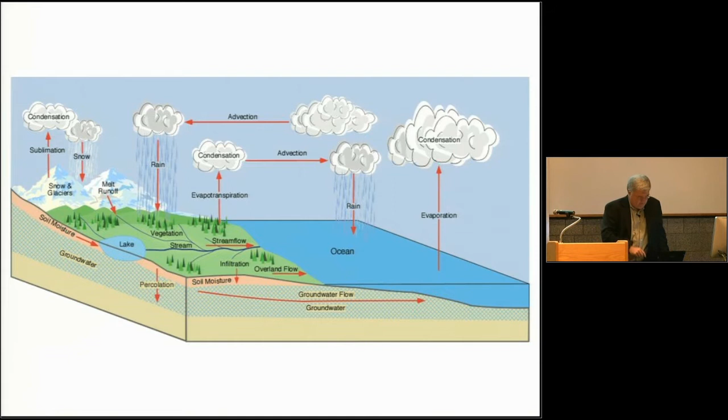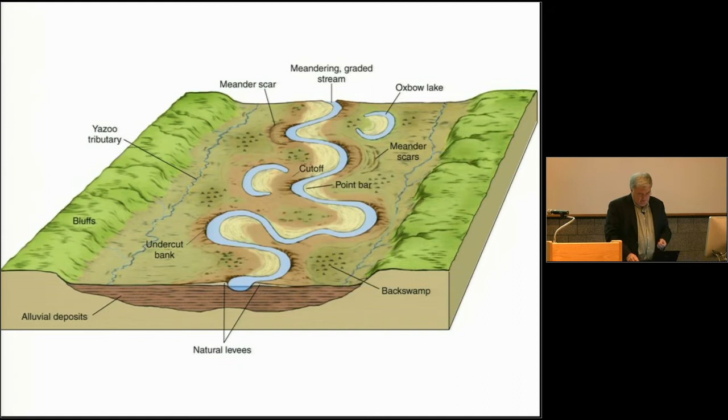Then when the water falls on the site, it moves into the subsoil. You have the interrelationship of the water at the surface and then the groundwater. And in between those two, there's that zone of capillary water that's available to plant growth.

Because we're landscape architects dealing with soil as a medium for growth and also as a medium for constructing hardscape, we need to be concerned with the groundwater and that area above it that has capillary water available to plants.

If that groundwater is too high, your plants die because they drown. If it's too low, they die from the other extreme. Being aware of that groundwater and how it interfaces with your plants through capillary action, where the groundwater is pulled up and made available to your plants, is important both at the macro scale and also at the micro scale.

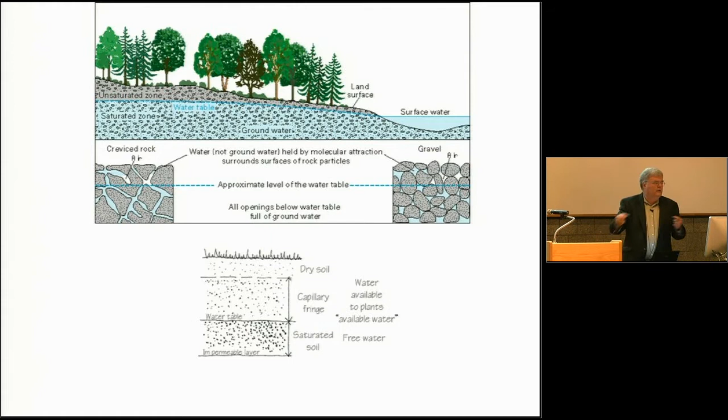Think about a beach by the ocean or a big lake with some wave action. There's a sweet spot where the sand is wet but not too wet and underwater, and not too dry, and that's where you can run. That zone is where the optimum strength-moisture ratio is for that particular sand. On one side it's too wet and too soft; on the other it's too dry and too soft. Understanding that relationship between moisture and soil is important both in plant growth and in structural stability.

When you're dealing around water, the problem generally isn't not enough moisture, it's generally too much. How you can deal with that is sometimes with under-drainage. Farmers have used under-drainage, drain tile, particularly in this part of the world, forever. It was once done with clay tiles; now it's generally done with plastic. It can also be done with swales to lower groundwater.

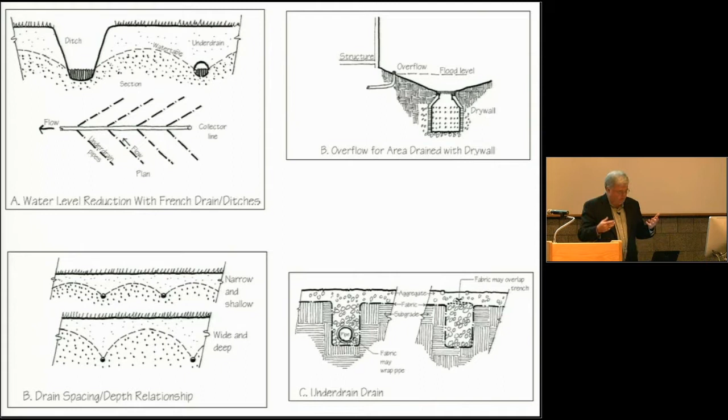Sometimes you want to deal with infiltration and filtration of fines at the top, keeping them out of lower, more well-draining soils below. You can do that with differentiation, having a very coarse gravel and going to finer and finer gravels as you move up. What happens microscopically at the top is that the finer soils form little bridges over the larger soils, and that's how old French drains used to work. They're actually still used today a lot. Contractors will often take shortcuts with fabrics, but that's actually trickier and less sustainable because fabrics can clog, whereas these drains tend not to.

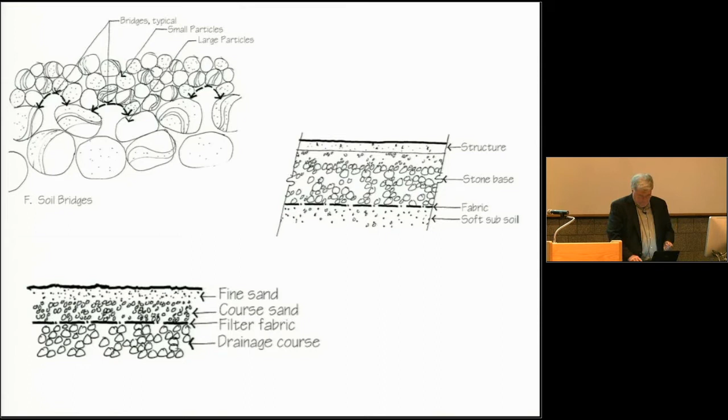That works great for buildings, it was developed for buildings. It allows moisture separation between inside and outside, and it allows for air movement. But if that detail floods, you could have serious problems with failure. In a landscape situation, that's not necessary, you can build solid on the outside. That air gap needed for a building to make habitable space isn't really needed for retaining walls and the like. So to pick the right detail for a condition, like flooding or a stream bed, you need to design something durable and strong enough.

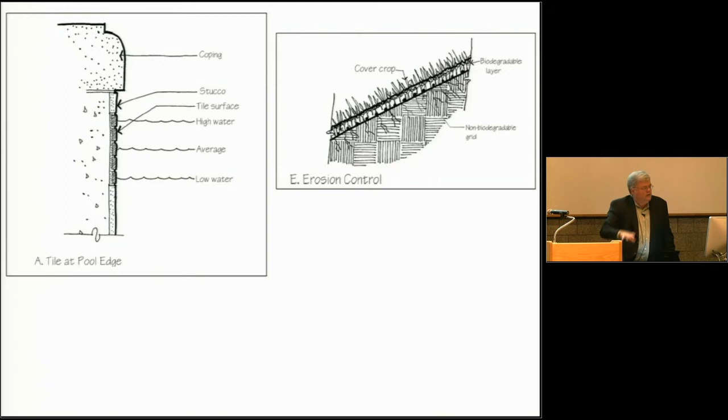On the right is a reinforced vegetated slope that can stand up to periodic inundation and flooding, where plants hold the soil for the most part, but there's an integrated plastic mesh of some sort that prevents blowouts and makes that edge sustainable.

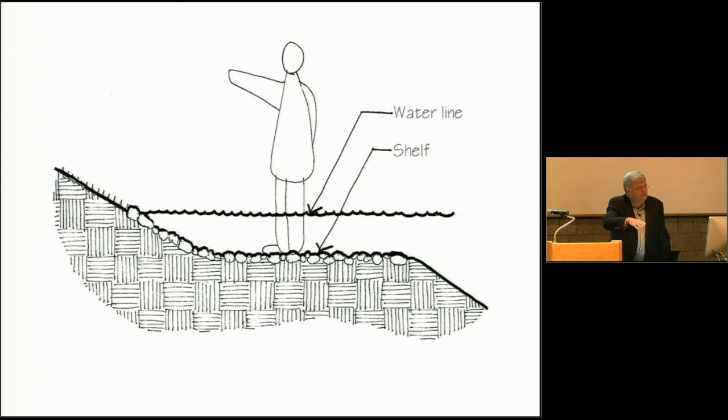There's a flip side to this. By creating a shallow shelf here, you have a lower, more shallow water area that plants can infiltrate into. So there's a trade-off between how that edge works, how vertical it is, how safe it's going to be, versus having deep enough water to keep out emergent aquatics.

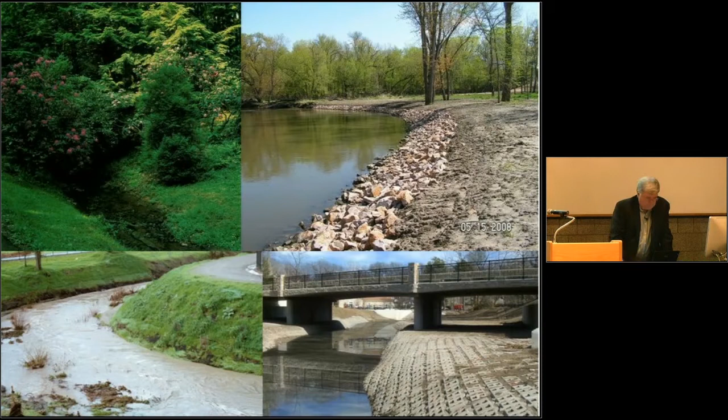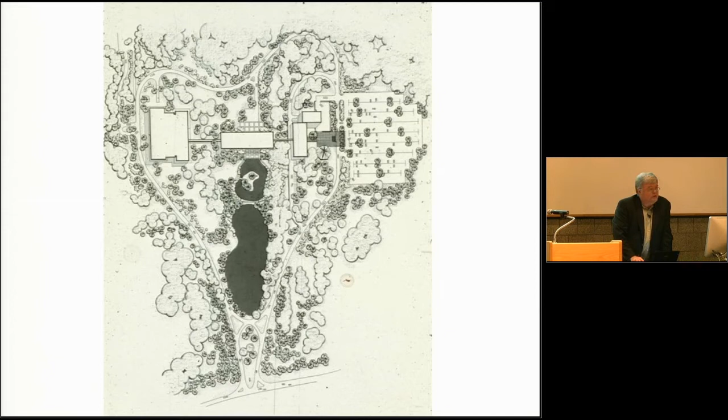This is a project in Moline, Illinois. It's an old Sasaki project from the 1960s, the John Deere headquarters, and it's a very manicured landscape. Didn't start out that way, but John Deere sells lawnmowers. And what started out as kind of a natural landscape, gosh, they turned into turf. And it's turf down to a pond level, with all this mowed turf.

Well, it's kind of unsightly to have that just kind of ragged at the edge. So this started out as very natural, and if you go back to the plan, it's a very naturalistic looking plan. But over time, the maintenance here turned it into something quite different. So this edge of stone was installed. There's an island with sculpture on it. But what started out as a very natural thing through owner's intervention turned into something very, very man-made in section that doesn't match the plan at all. Still pretty.

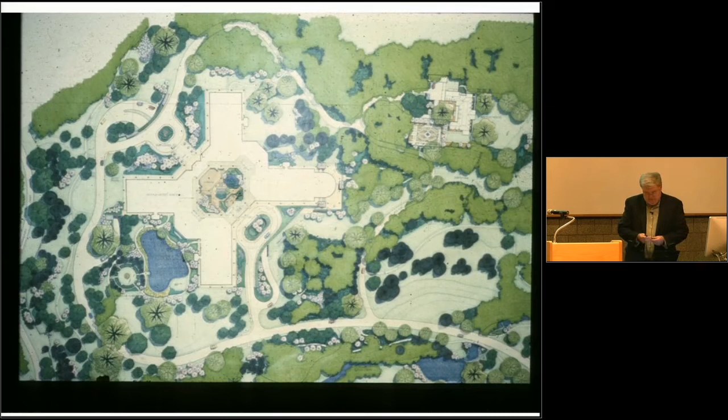This lousy picture is a corporate headquarters outside Cleveland. It was built for TRW. It's now the Cleveland Clinic. And this one has two interfaces with water. There's one here, which is a static pond, and one over here where a stream comes through and is impounded. And then there's a weir and a second weir over here to maintain water underneath a bridge.

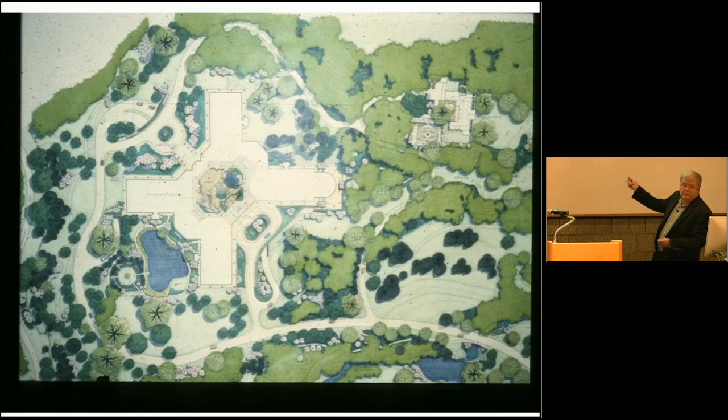So looking at this is the static pond by the building, which has a combination of soft edges and hard edges and deep water and shallow water to accommodate aquatics, and then the interface of land to water as more of a clean edge.

But this is the bridge, and in the foreground you'll see the weir that backs up and creates the larger kind of kidney-shaped pond, and then there's another weir beyond the bridge which maintains a constant water level under the bridge. This was an intermittent stream that came and went, and the architect that was heavily involved in the bridge said, well, we got to have water under the bridge all the time. Okay, how do we do that? Well, we put in a couple of weirs and we'll dam it up. We'll leave it there. Even if it's not flowing, it'll have water over your bridge, will make sense even in August.

So there was this kind of curvy design that was put in, and weirs that were supposed to look like they'd always been there. But it was done more by how it would look in plan and how it would look relative to the existing vegetation. It swooped in and out and around some existing trees. And over the long term, it didn't really work very well, because the stream ran fast in the spring and then slowed way down, so you got a stream channel that was basically the old stream channel that was free flowing, and then you got deposition.

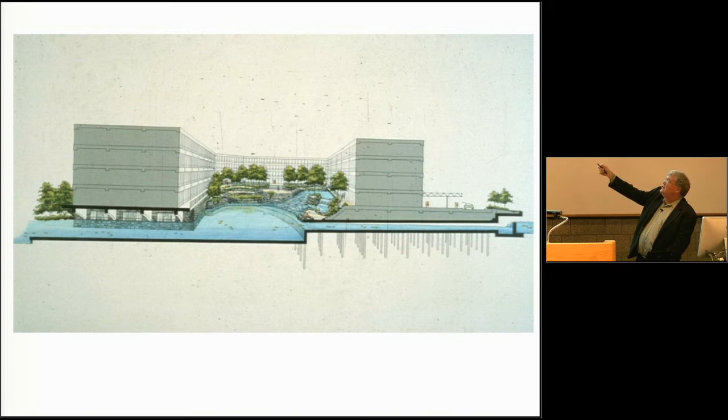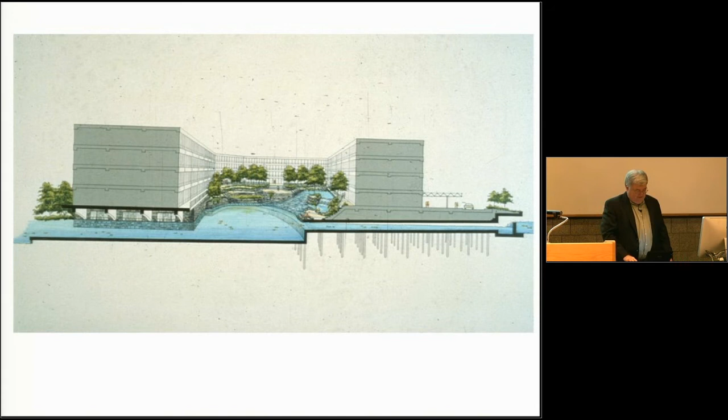So, working with the engineers, they developed a massive flood conduit that goes right underneath the main lobby of the building and spills out underwater. The right-hand side is a bridge. Aesthetically, you have the water circulating in ponds upstream, and it disappears. You have a drop-off in the main lobby, and hanging gardens and things that work down. You have your communal space, your cafeteria out in this bridge space that looks out to the lake. But in order to get there, you had to create a huge infrastructure under the building to make this work.

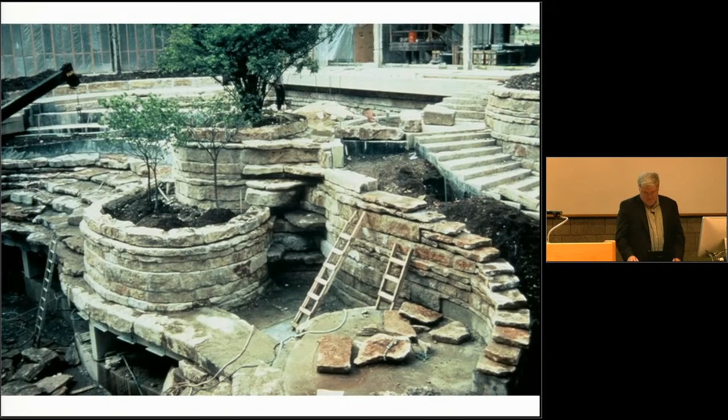That big open area is the flood conduit that allows water to pass through unobstructed. This is the construction of those gardens that are the center of the atrium of the building, built on the structure of the conduit. You can see the structure below here, where the water comes out in 4 barrels, and 2 are redundant, so if one gets clogged up, the other 2 still work. So it's engineered and counter-engineered, and that's what it looks like when it was planted.

So it's kind of the basis for this garden. It's a hot climate, so you have all that water evaporating here and pulling the cool air up through the middle. So from that standpoint, it works, but they went to a tremendous expense to make it happen.

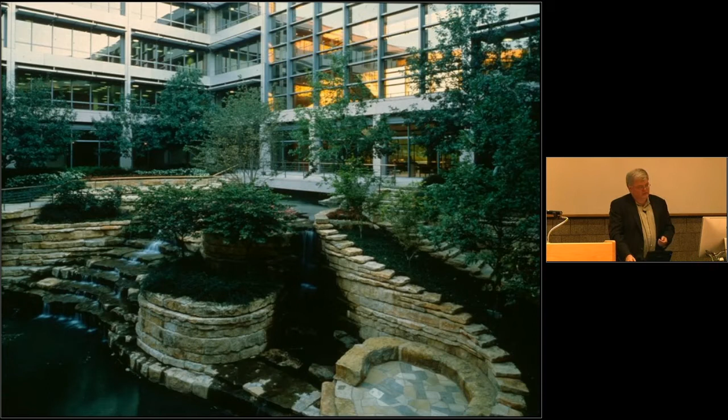Another picture, this is a picture of the cafeteria cross that's on the bridge that spans over. Another picture of that. This is the edges of what happened to the edges along the lake. And that's the spillway at the other end, which shows the capacity of the water that comes through here when you have the flash floods.

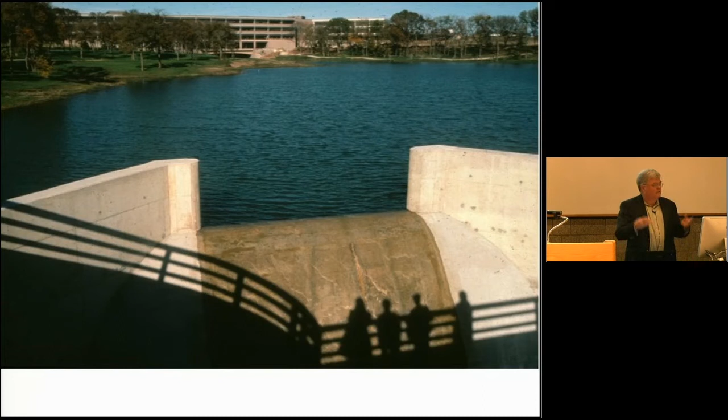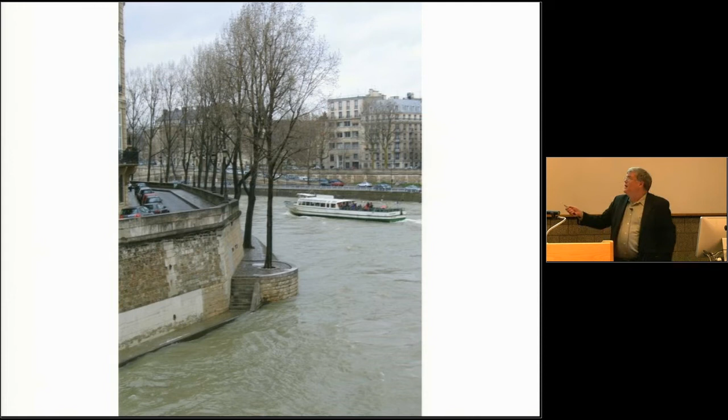There's an access down here, a stairway up, another level here, and high water is up here somewhere. So at any point in the water, you can get down, or get down to a portion near the water, and engage the water as a pedestrian.

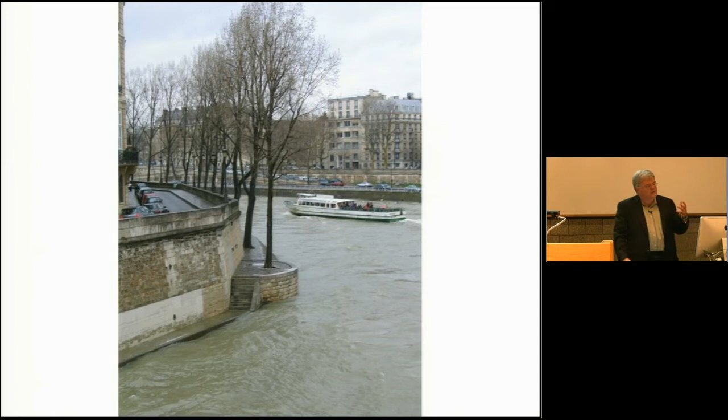Here they have boat traffic on the Seine. This is fairly high water, and they have a series of ramps and stairs and another level up, all engaging the river at different flood levels to allow people access.

One thing you notice is that when rivers flood, you get a lot of junk, and when it goes down, that junk deposits. This is fairly clean compared to other rivers—depending on whether there was more of an agricultural watershed, this would be full of silt as well. But the Seine is fairly well developed, so you don't end up with a lot of active erosion, though you still get the junk.

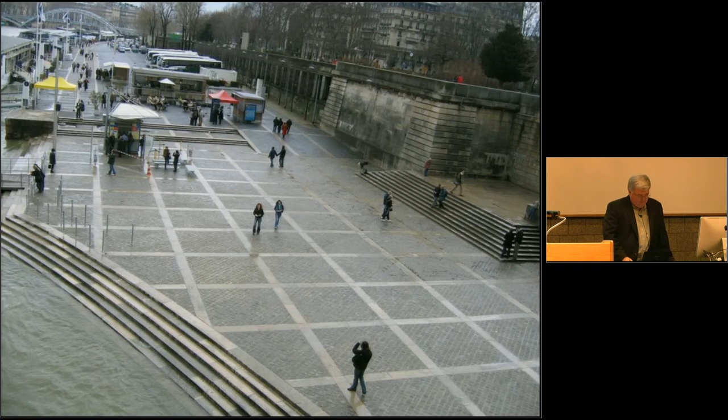This is another piece, the base of the Tour Eiffel. This is a plaza, and you can tell that normally the water is down here someplace. It started up, but it can go up to here, and you get one relationship—it can even start up those stairs, and you still have access down to the river. It's a very dynamic thing, and it's actually more interesting for having those level changes, in relationship with the river.

This is Race Street Pier in Philadelphia, a Jim Corner project. It was built on an old derelict pier, and piers tended to be built level, dead level. So this was built on the structure of a pier, and the basic structure they rebuilt and built on had no topography to it at all.

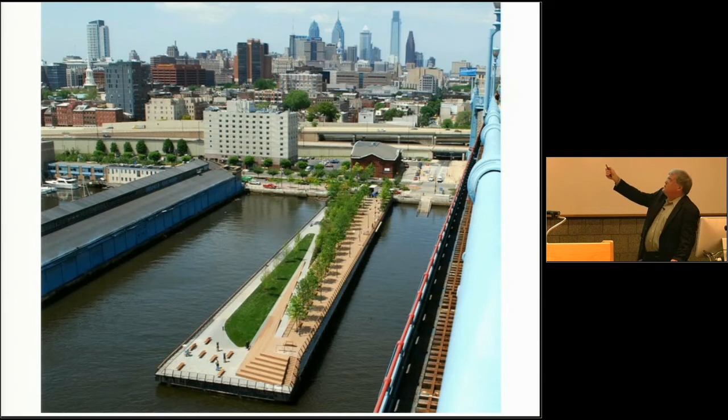You end up with the river fluctuating up and down, but you have a level datum to start with. So what the designers did to break away from that and give some interest is they built up this portion as a long ramp starting at the street, coming up to a promontory with a series of steps and a ramp back down.

As you move into the park, you have this procession of going up and up and up until you get to the end. Then you get a view of the river and you discover the rest of the park around the back.

So on a very tough, level, structural slab, very narrow, they created a site with a lot of interest. But basically they're building on a concrete slab above the water, so they're in almost no relationship with the water. It's something to look at rather than interact with.

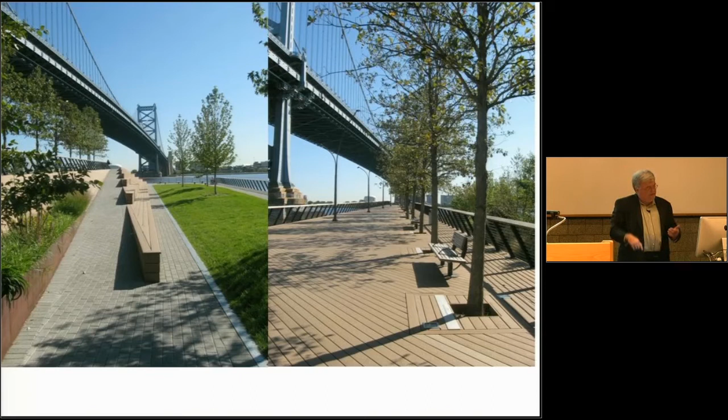So this on the right is a picture of when you come in and that rising deck that goes up, and on the left is the ramp that goes back down on the other side. This is the level grass area that you discover when you come up to the promontory.

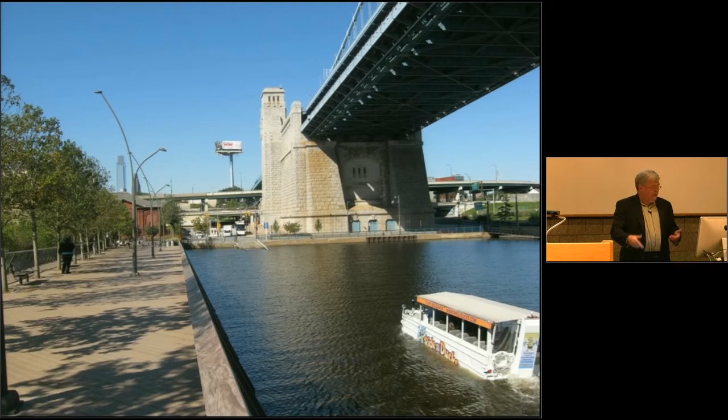They do interact with the ducks somewhat, but the interaction with the water is fenced off and kept away. So you have different scenarios when you design how much interaction you're going to allow for, how much you're going to use. Here it was fenced off as a safety measure.

And this is the promontory at the top looking out on the river.

This is - how am I doing time-wise? Oh, how much time have we got? We've got 2 hours? Okay, good. Just checking.

This is Van Valkenburgh's park in the Hudson. The plan is - Manhattan's off the page up here. This is Brooklyn, the Brooklyn-Queens Expressway comes through there. This is all old pier here. You get some derelict pier piles over in this section.

There's a sloping lawn that looks out to the river with Manhattan in the back. There's a ceremonial stair here to another promontory, another lawn that flows back off in this direction. Back over here, there's a whole bunch of stuff being developed with a carousel and a little beach and whatnot. This is where those pilings were from one of the old piers.

It's kind of - the Hudson's heavily used. There's boats out in the Hudson, big boats, a lot. So the edges all tend to be very hard to withstand all of that, both that and the flows of the Hudson, because it's a big river, it's a monster watershed.

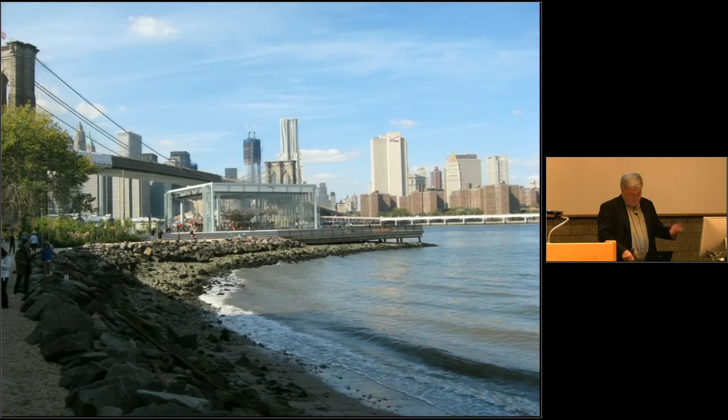On the next eddy up, on the next inlet, the water's moving slow enough to even create a little beach here with a carousel on this adjacent project.

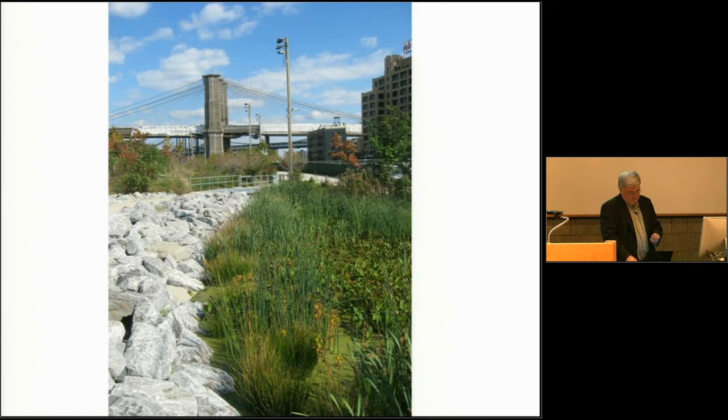Then the main edge along the front is hard - it drops to the water. You have a big open promenade where people can gather, and you have the New York skyline across the river.

This is kind of looking downriver, New Jersey's kind of off just to the right. But you have a rail that keeps people out - it's a mesh, so it's nearly transparent, but it's a hard, safe rail, whereas you didn't need it where things were flatter in the lee of the river. This is that green lawn that slopes down towards the river.

I've never seen it when you could actually get out onto it. It's been loved to death. You get 20 or 30 thousand people on there, and it's so small, and Brooklyn is so big, that it's oftentimes roped off. It just can't put up with the traffic. There's just too many people, and it's too small to accommodate them. So oftentimes it's closed.

This is the promontory adjacent to the steps, right across from Manhattan. So there are lots of opportunities, when you're on the river, to look both at the river and at the other shore. Because the other shore here is Manhattan, a lot of those views are directly across. In other places you might want to take your views and run them downriver or upriver, but because you've got the Manhattan skyline, why not?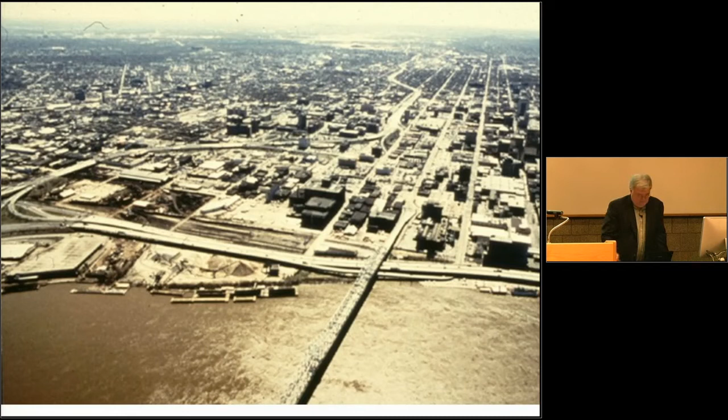This edge of the city had always historically been industrial, so they had no idea what was under there when they started. There were lots of precautions taken early on, assuming the worst, that this would be a terrible place you didn't want to get down into.

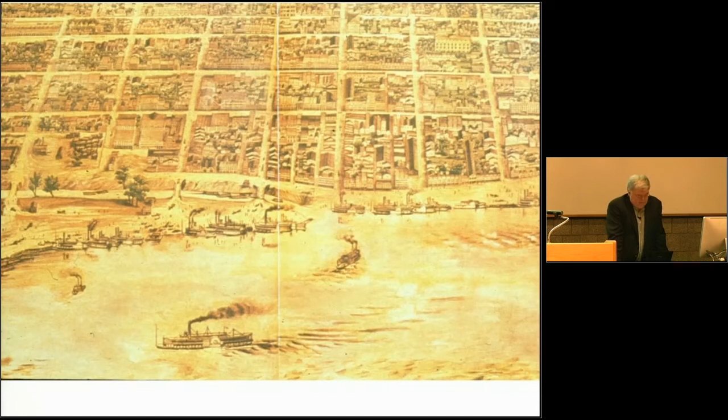Also, this became very early on the site for lots of stuff. Thunder over Louisville brings in thousands and thousands of people, and they stomp on every available square inch of the site. Then they come in for concerts and do the same, and this comes shortly after flood season. So the maintenance down there is incredible, but it has to be usable.

The consideration early on was to create an infrastructure that would allow for the flooding, allow for cleaning up the flooding, and for things to then be able to recover in a matter of months rather than years. Everyone who has experience with play fields and athletic fields knows what grass usually looks like after that kind of traffic - mud, yeah, it's lousy. But when you go down there, this looks pretty good.

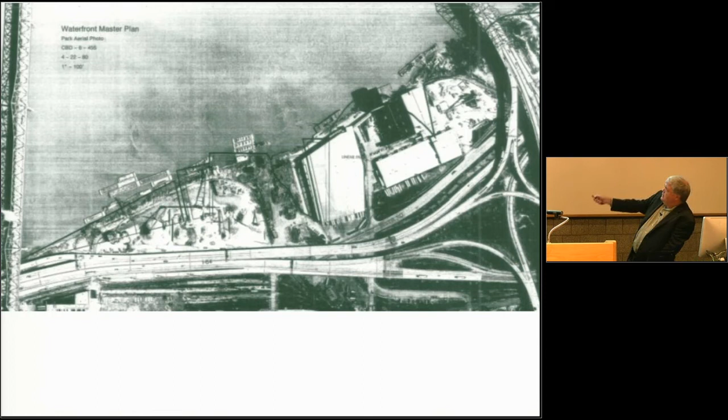This was an air photo of the site, the befores - you can see some of the old warehouses and staging areas. The site was basically bounded by the bridge over the Ohio to Indiana in the north, and the Main Street Bridge on this side. This area here all became redeveloped as a reaction to the park. A lot of the park's intent was to bring new development to Louisville, and it was very, very successful.

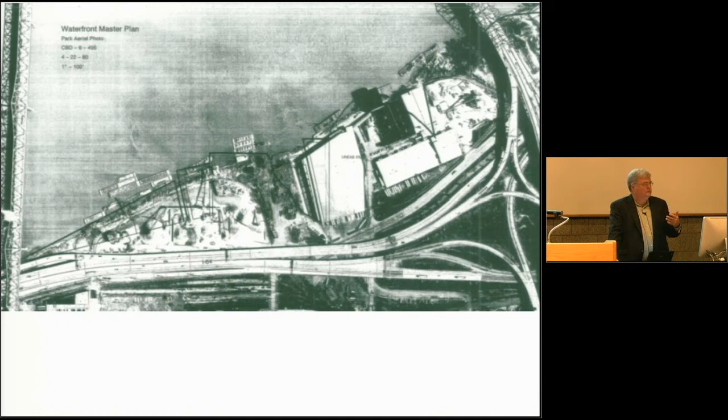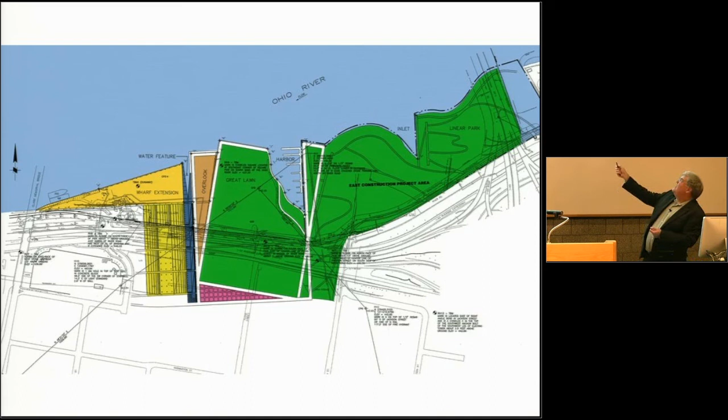Now there's a remnant piece of the Great Lawn over this other triangular piece. The design idea was that it looked like there was a schism and it kind of floated off in that direction. This created an inlet here, a harbor for a marina, and a similar move on that side created a little inlet. So those are the main pieces of the design.

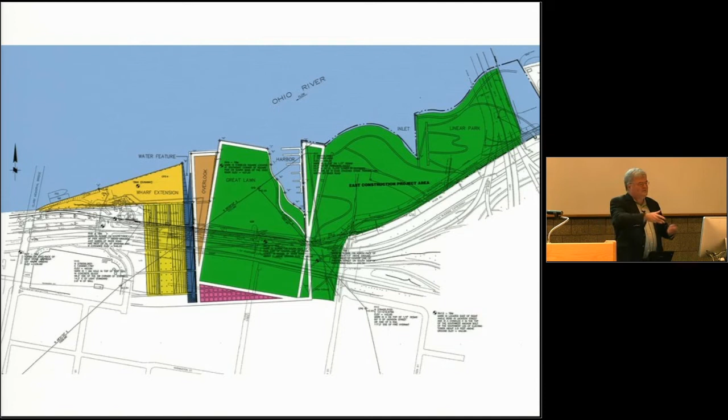A lot of the design thinking and description was about these riverine kind of landforms, these invented words that started when Hargreaves was doing San Jose and was continued here - the patented Hargreaves berms that snake around. It's everybody's now, I suppose. Anyway, here they're used to create that linear park.

Ten minutes? I'll move quicker, sorry.

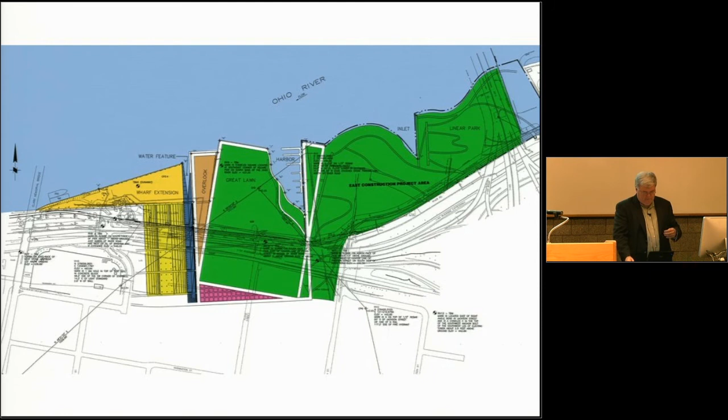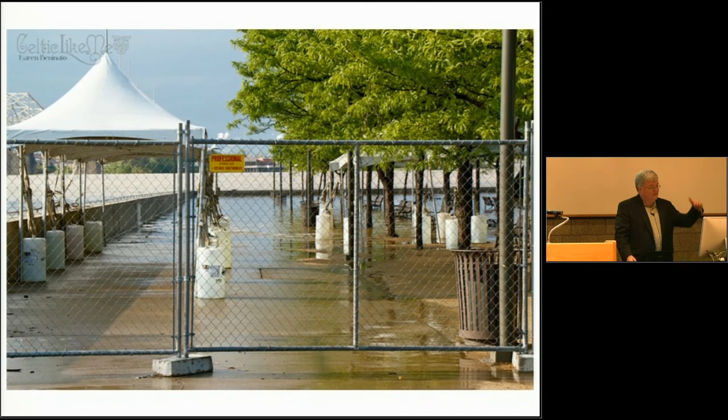So flood's a big deal. It floods even up to the bigger overlook. These are kind of flood pictures everywhere - flood's a big deal. As you can tell, there's lots of stuff and lots of silt because the Ohio is actively eroding.

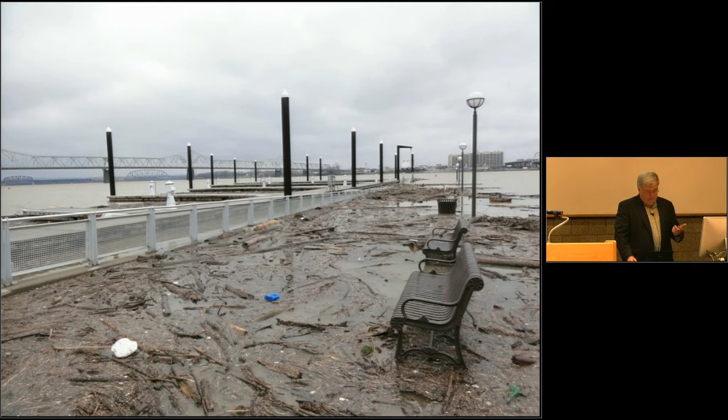So this is kind of the overall again. I'm going to hurry up and run through this a little faster.

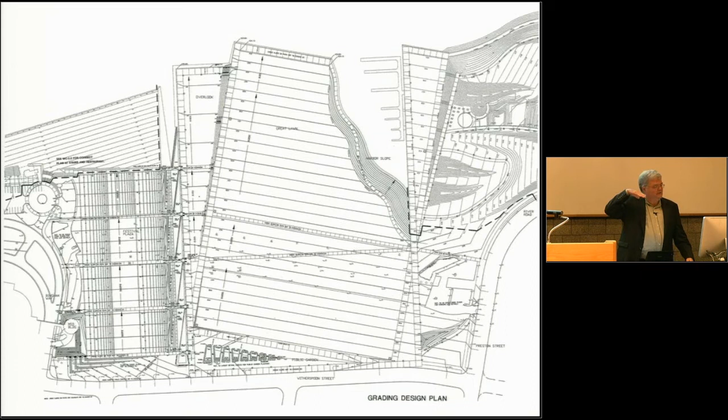Here we go. So the Great Lawn, which is this big grassy thing that goes from the city down to the water, this is the grading plan for that. It's one continuous gradient. If you want it to be one piece, it shouldn't have any kinks in it. So it goes from one mass gradient all the way down to the river, taking your eye down to the river.

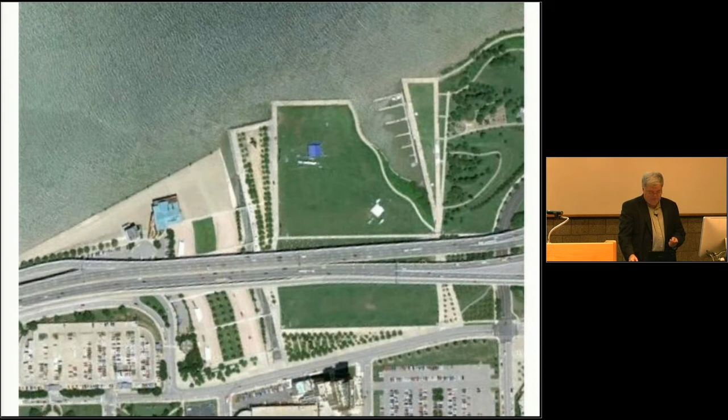Not so successful underneath the overpasses. There just isn't enough light to support good grass growth. They looked into supplemental lighting, and it was just outrageously expensive. It wasn't really feasible, so they reseed it with annual rye 2 or 3 times a year and sacrifice it that way to keep that level, but it's still not terrific.

There's a hard edge on the right side where that little cutoff is, but it's used. It's lit at night, and it's used all the time. There's always people down there, pick up Frisbee, football games, always in use. You can go down there at 10 o'clock at night, it's full of people.

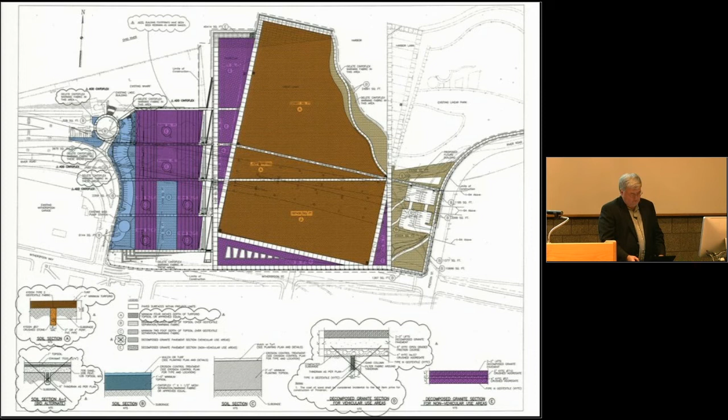So these areas show some of the surface treatments. The brown is the Great Lawn. On the left, you can see the Great Lawn has drains underneath it. The purple areas all have a material called decomposed granite, which is a soft material for walking on. And then the tan over there is a more basic planting thing.

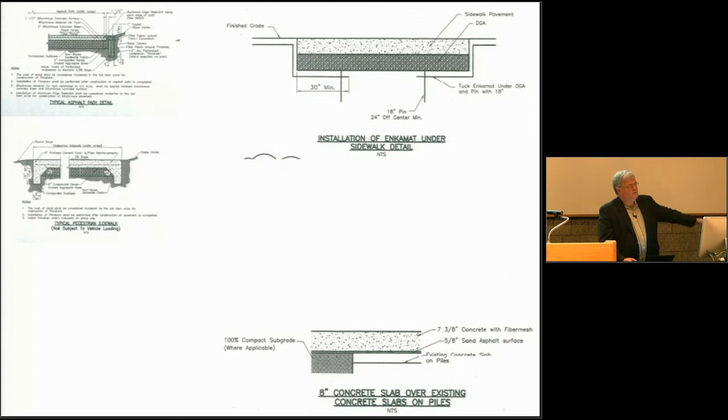These show some of the engineer's details. Because it was potentially a brownfield site, they needed some sort of warning, some sort of separation between the subgrade and the finished grade coming in. So over every meter of the site is a warning grid. It's a fencing material—sometimes you see them, they're like bird netting. So that was used over the entire site as a warning, so if you dug down, you'd know that the site below was potentially

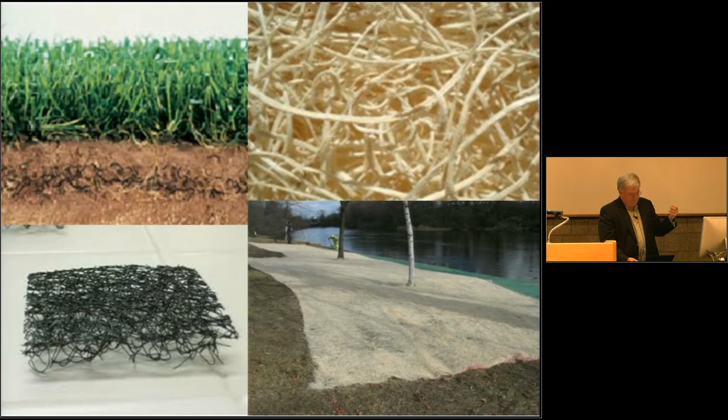a brownfield. Here shows how the site would be stabilized, some with grass, some with Curlex blankets, some with erosion control blankets. The lower left is an Enkamat, which is a 3-dimensional plastic reinforcement that was used on slopes. The Curlex, in the upper right, is shaved aspen, which is biodegradable. Sometimes they were used in combinations, but these are used on all the slopes.

But the Great Lawn itself was built from a material called Netlon, which are little plastic grids about the size of a playing card that are mixed into the soil fabric. As the roots go through, they stabilize it, and it acts just like reinforced concrete, like fiber reinforced concrete. It was developed and used in racetracks. If you think about how much pressure a horse hoof exerts on turf, these were developed to still create a soft, resilient surface, but something that was really durable.

By using this, they can clean the silt off the Great Lawn with fire hoses without impacting it, and it keeps the lower levels of the soil profile from being overly compacted, yet they can still come back in with aeration and service them. It's been a tremendous product.

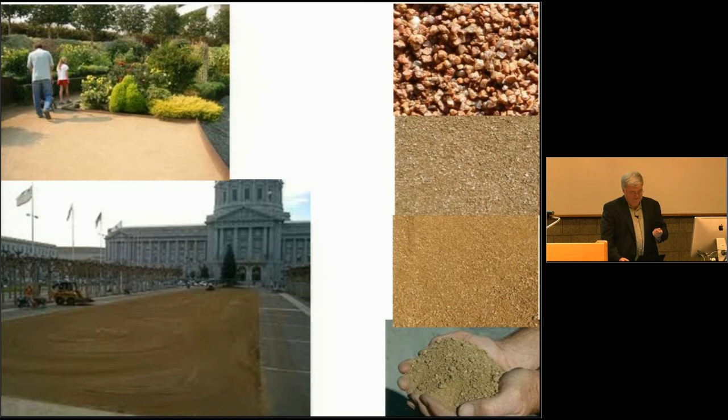Then there's decomposed granite, which is a fine sieve material, soft, somewhat permeable, imported from California because they're California designers, but there's a great feel to it. Probably could have been finely crushed granite or limestone screenings here, but they wanted that.

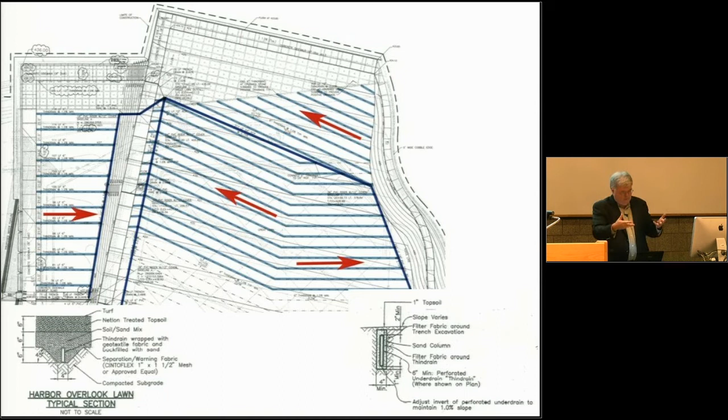This is the overlook, the larger piece looking over the Great Lawn. That's decomposed granite on the ground, under-drained with netting below, with bosks of trees. Coming back farther, you see it's slightly rising as the Great Lawn is dropping, so you end up with stairs in the interim and stadium stairs where you go out and view what's happening on the Great Lawn.

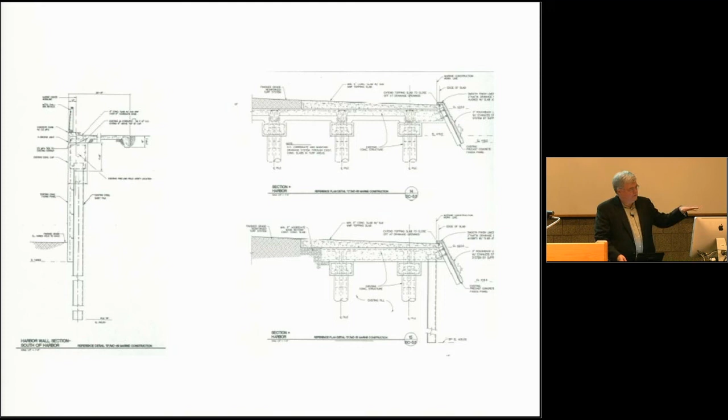In addition to old tree limbs, branches, and trash, there's heavy barge traffic on the Ohio, and occasionally those barges get loose. So the edge pieces were designed accordingly. The edge piece I showed you, beyond the under-drainage plan, was supported by piles driven into the ground with a concrete deck poured over them—that's how most of it was designed.

A precast angle was installed—massive, about 12 to 14 feet high and 14 feet across—filled with concrete, and in between was a big rubber bumper. When a barge hits this, it slides in, hits the concrete, and slides across this base. The bumpers, set up in pairs, flex and then give out, so the damage is confined to just that front section. They can push it back into place and resheath it in limestone without destroying the whole thing or the barges. So this detail was a function of that heavy barge traffic on the edge.

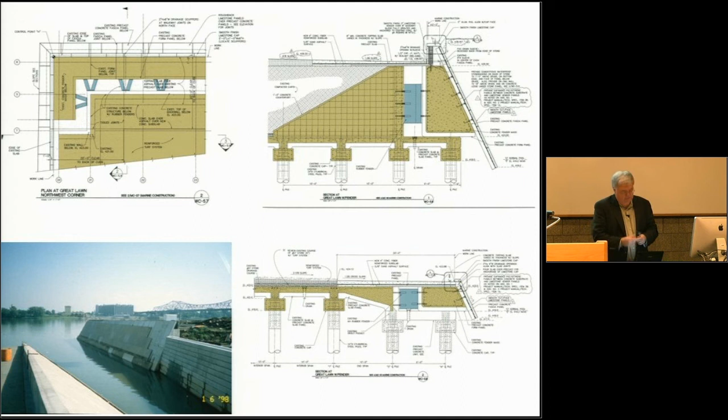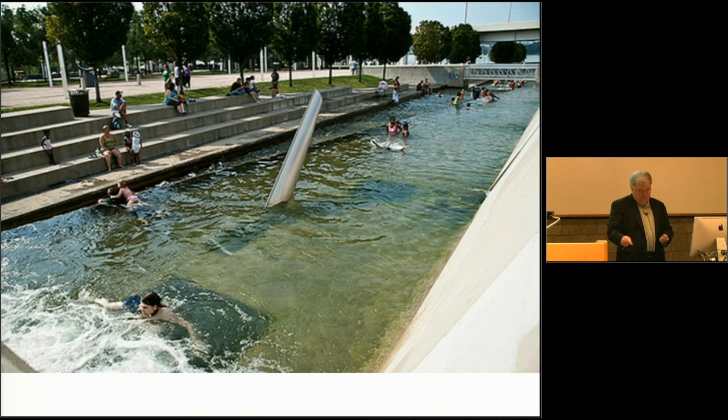Then there's a fountain that starts as a source fountain with standard jets out of the ground, flowing down into a series of pools—that funny looking metal thing is a jet, and the jets flow from one pool to another all the way down to the river. At night the jets are lit and come off intermittently, exploding from one pool to the other, lit up on the sides. It's pretty cool.

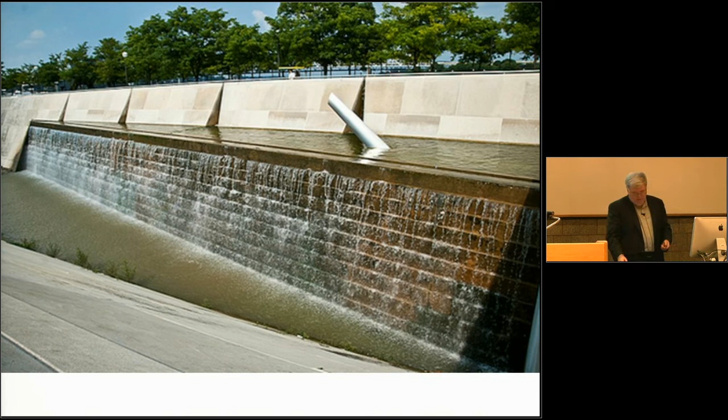Looking back, there are paths that cross over the fountain, falling from triangular basins down to other triangular basins on their way to the river. This is along that edge, along the weir, so it's very active coming down. It's captured and recycled, but the design intent is that it appears to flow right into the river as part of it.

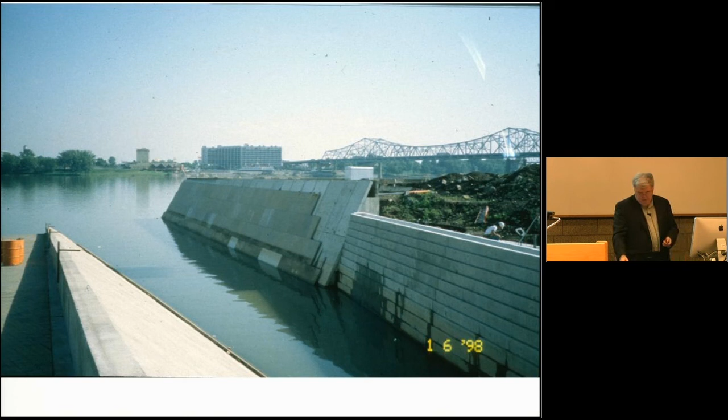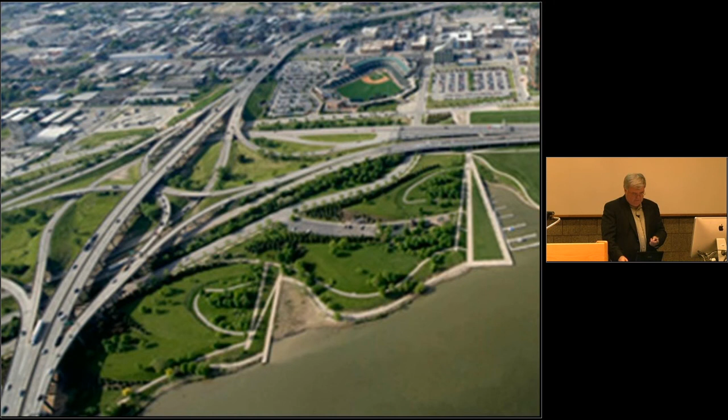The linear park is very soft, with lots of seams and zones of heavy planting and tremendous views back to the city. In Van Valkenburgh's park, looking straight across you see Manhattan, which is terrific. Here, you're looking back at southern Indiana, which has a Days Inn and a few other not-so-hot things—the really beautiful views are back to the city or downriver. So the landscape is set up to create views and open lawns that go askew, not straight across.

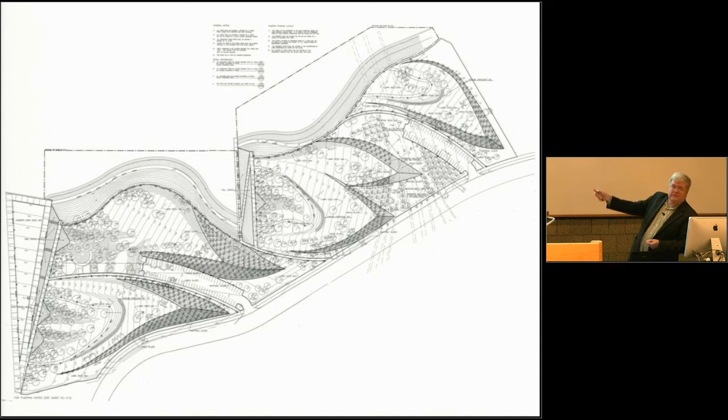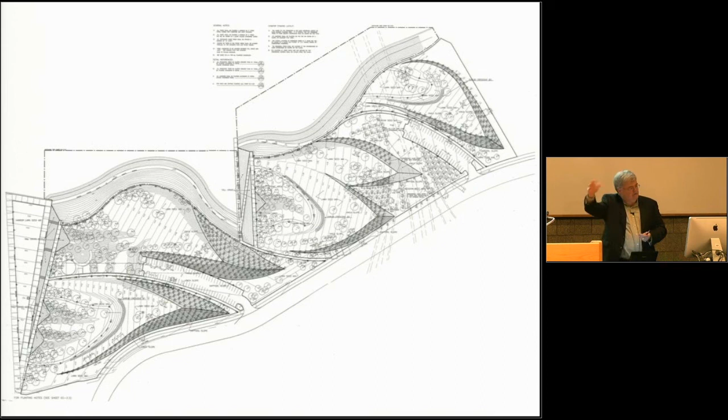So the views then kind of come out this way and this way and this way, all down river, down to the bridges that are downriver. So within that very narrow section between the highway and the river, you have lots of up and down, lots of different spaces, and they knock out the sound one from the other. This is a plan which showed how the different slopes were stabilized and how much soil there was under them.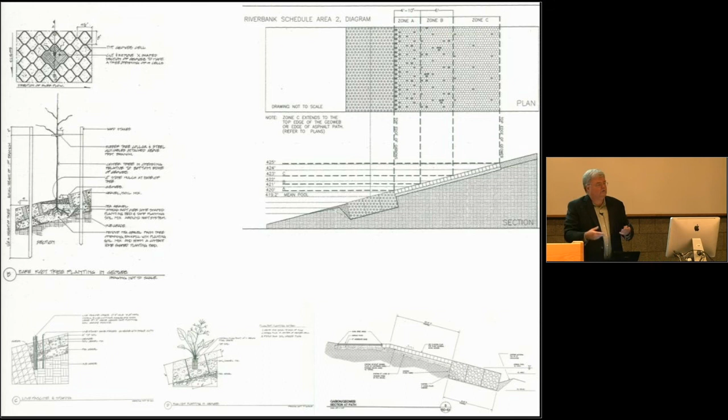We interplanted with, in some places, trees cut out in very small caliper, but trees that could take the inundation. We had some emergent aquatics low. We also had some live fascines. So we went out and collected live cuttings of predominantly willows and alders, riverside plants, and stuck them in green, and they rooted.

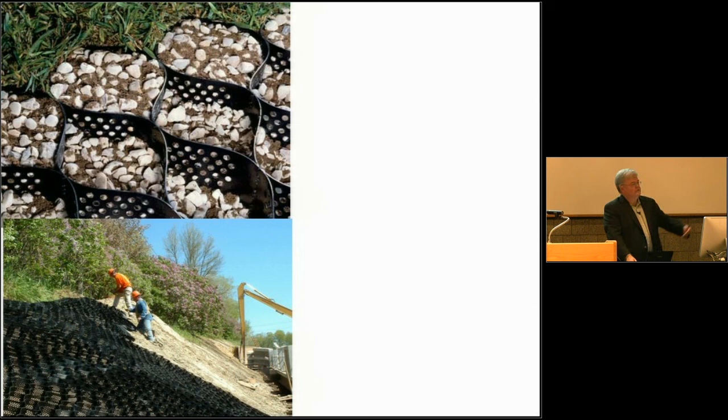So this is kind of the geoweb fabric, and you put the stone in, and it's really hard to dig in this stuff. It is nearly impossible to dig this stuff out. You almost have to toss the stones out. So the live fascines, which are basically driving in these sticks, worked really well, but the other stuff didn't.

Typical planting details. On the right is how trees used to grow when I was your age, which was kind of like how we thought trees grew in the 1970s. So the planting details look kind of like this slope-like thing. And now we think trees grow like that, and planting details kind of respond to that.

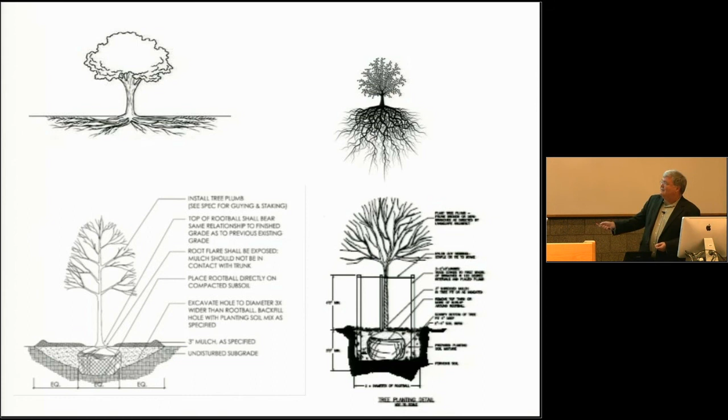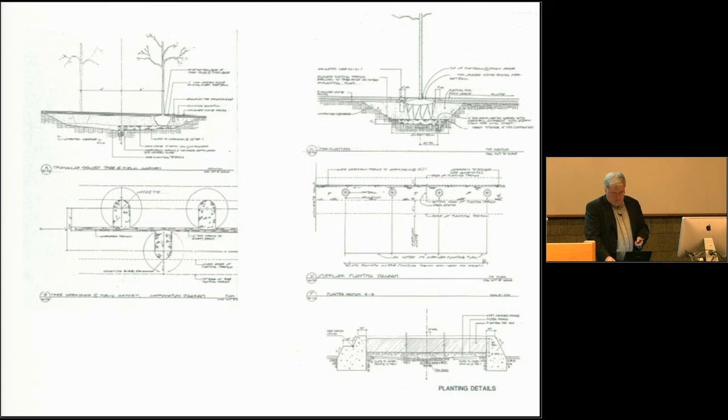So for instance, all the details here had to respond to the soil conditions. The upper left shows a series of under-drainage for all the plants that were going to be inundated in the flood, so you had to get the water off of them so they didn't drown. There's a series of under drains in plan, picked up in section here. There's another under drain here. Even the planter beds out there for the community gardens are under-drained to be able to get the water away once it's down, so it didn't stay saturated.

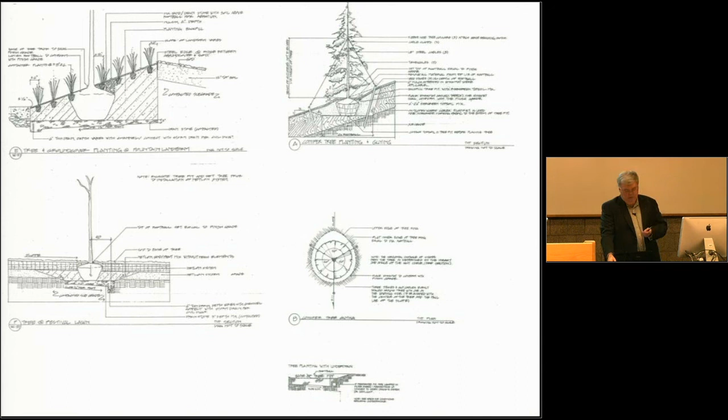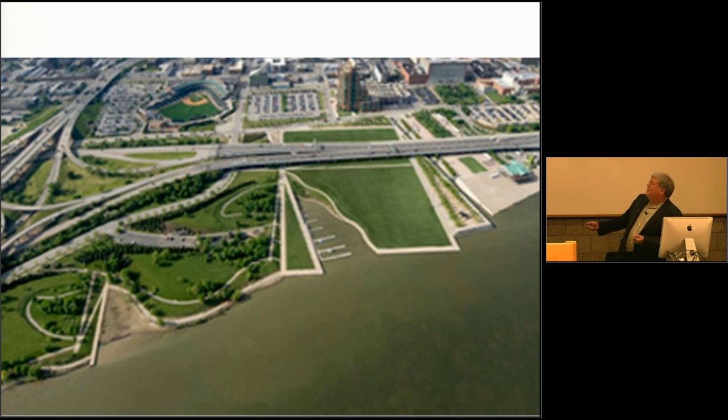One more point and we'll be done. The plan kind of took into account a lot of the activities of the river, but some of it were more aesthetic moves. One of the aesthetic moves was this cut and this cut. This picture was taken probably 7, 8 years into it, and you can see that there's an awful lot of stuff that went into that inlet and never came out.

So for instance, years later, that disappeared altogether. It became grass. This over here, because it's a marina with traffic in and out and they rent those slips, it's worth it to them to keep that clean.

But this one never was kept clean. When you look at the larger scale of when those landforms happen, they usually happen at the mouth of streams, which come out and keep that clear. Well, that didn't happen in this case. Oops, wrong one, let me get this one.

This is a copy of the storm drainage plan. We have an interstate highway up there with major water coming out, and all the drains go straight to the river. None of them feed these inlets. So had this been directed here, and some of this directed there, maybe even some directed there too, that might have kept it flushed. But we'll never know. That occurred to us too late in the process to do anything about.

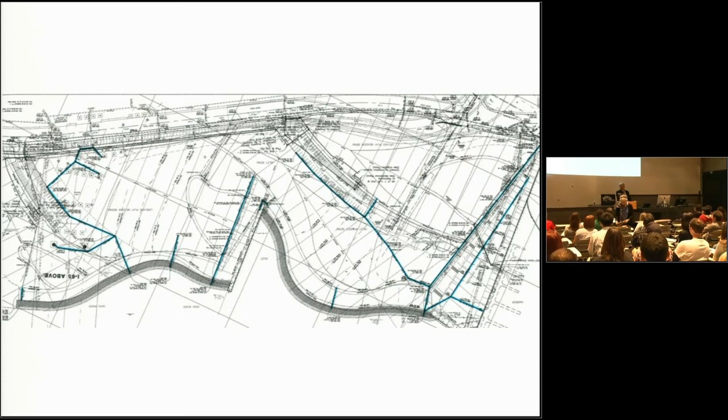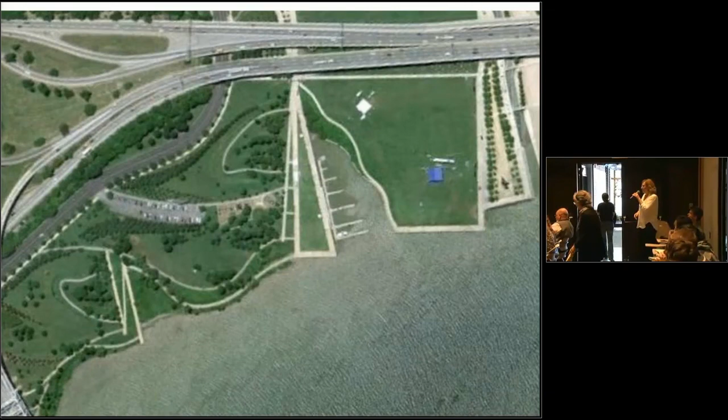So you've worked with some pretty high-profile designers. Can you talk about how you have worked with them to link their design ideas and the implementation that you help them with?

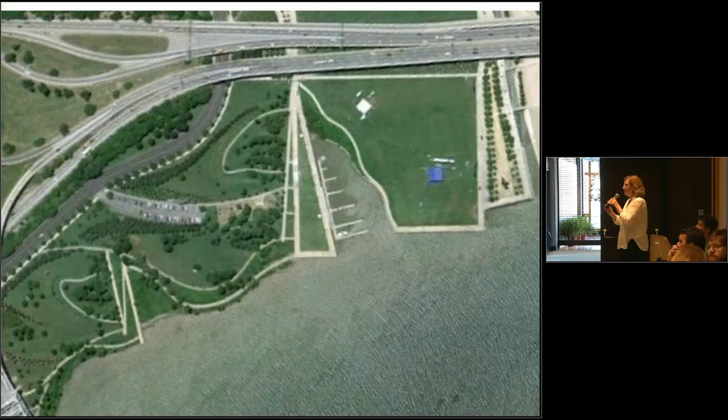Well, part of it was just dumb luck and not being able to hold a job. I worked for a lot of different places early in my career. I'm being facetious, sorry. I had the opportunity to work with a lot of people early on who went to other offices and knew I was good at what I did and brought me along.

Jody and I were taught by Pete Walker once upon a time, so I worked with Pete. I worked with Martha Schwartz early on, and she brought me in to consult 15, 20 years later. When I was a principal at Hargreaves, I had people working for me who went off to other offices and brought me in when they had tough problems.

But I've been fortunate to work with really good designers and have my area of expertise reinforce what they were doing. All good designers are interested in construction, how their work gets built, that it's built well, and that it holds up. The worst thing you can do is come up with a great plan and then have it built and say, why did they do that? Or have it ripped out two years later.

So I kind of built a sub-practice on being able to go in and consult, work the construction process, work the documentation process, and work the construction administration process to keep the designs alive. I had to beat up on engineers to say, have you ever thought about doing it this way? Or why can't we do that? And be able to go into the numbers with them and say, there's these products that work, here's their performance criteria, and why won't this work? Most of the time I win.